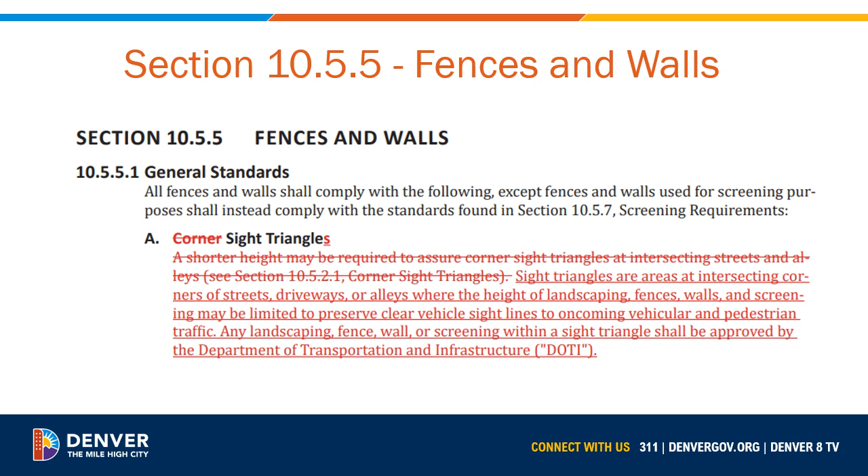In section 10.5.5, under corner sight triangles, we've clarified the requirement for sight triangles when a fence or wall may affect visibility at intersections with a street or alley, and that any landscaping, fence, wall, or screening within a sight triangle must receive approval from DOTI, the Department of Transportation and Infrastructure.

10.5.5.1c covers overheight fences, or the exception from maximum height. The criteria for the fence not being allowed to detract from the safety or pedestrian character of the existing neighborhood has now been added to item 2, and existing neighborhood is now a defined term in Article 13. That definition describes which blocks are included in the existing neighborhood for evaluation of the pedestrian character of the neighborhood.

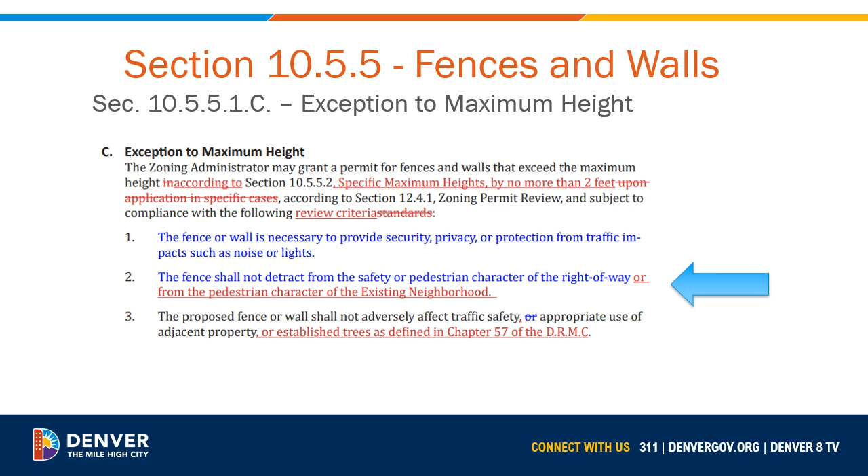Under the exceptions to maximum height, under point 4, this gives the ability to the Department of Parks and Recreation to approve an overheight fence adjacent to a designated parkway.

Point 5 states that any section of an overheight fence or wall shall be a minimum of 50% open. The 50% open standard now has a rule of measurement in Article 13 as well, in 13.1.13. And in point 8, staff approval of overheight fences and walls is limited to an increase of no more than 2 feet above the maximum allowed.

Any height greater than 2 feet over the maximum can only be approved through a zoning variance by the Board of Adjustment.

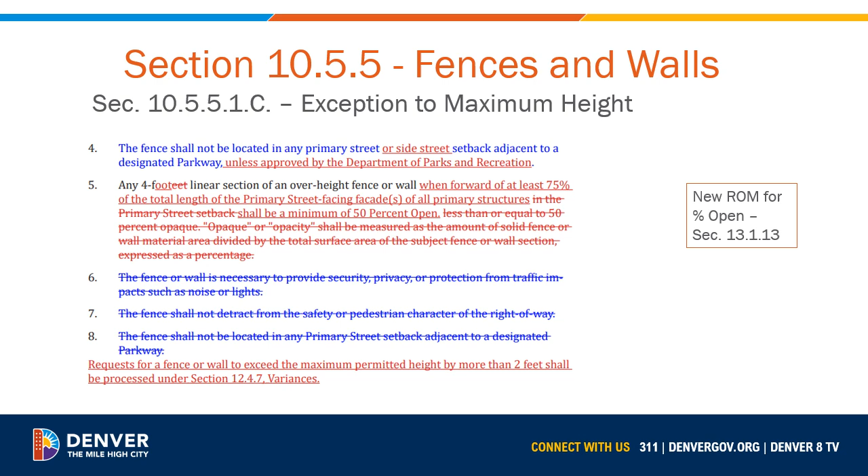Under the material standards in 10.5.5.1e, there's a new allowance for the installation of barbed wire or a non-lethal electric fence system if it's approved by the Denver Fire Department, without limit, and there's no zoning permit required. This is only allowed in the IA, IB, and National Western Center campus zone districts.

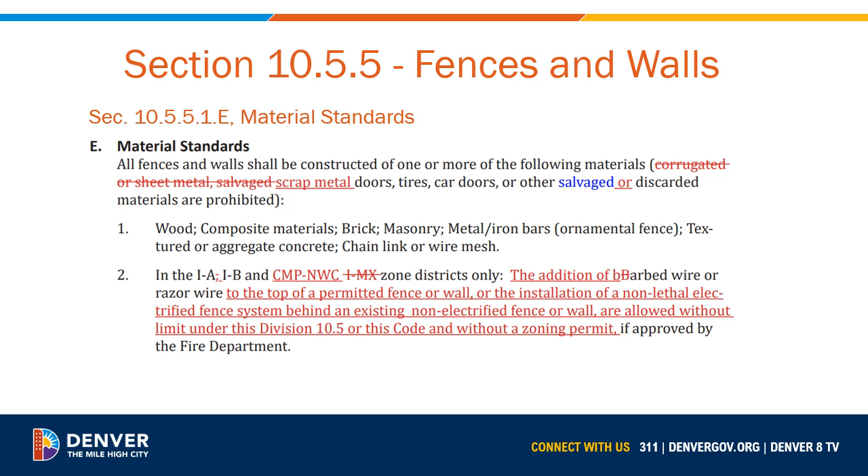Under section 10.5.5.2 for specific maximum heights, we've consolidated the maximum height standards for all zone districts into one section of code rather than repeating them in multiple sections.

The applicability section now refers to fences and walls accessory to single unit or 2-unit development and to all other primary uses in all zone districts except for IA, IB, and the National Western Center campus district.

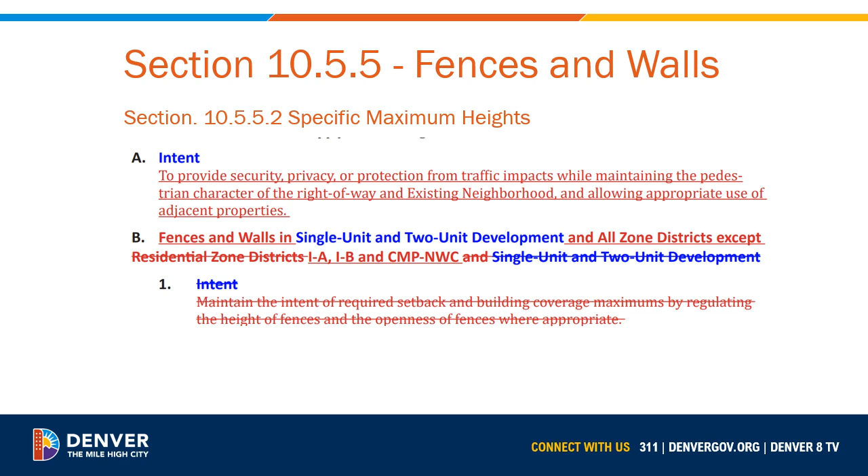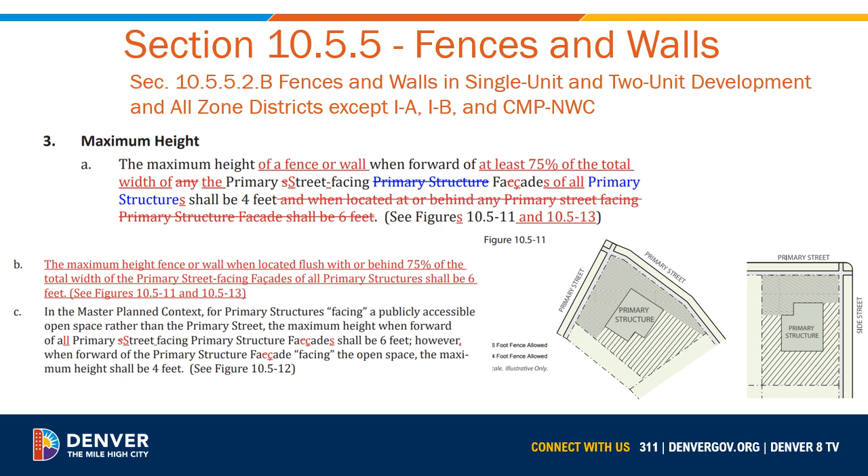This section for mixed-use commercial zone districts, OSB and OSC, has been removed because these have all been incorporated into the applicability of B above. The standards were substantially the same, so this reduces the unnecessary repetition.

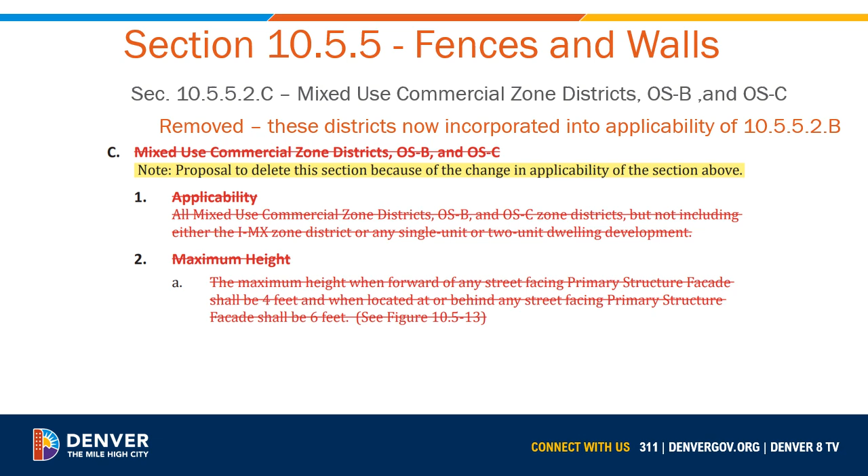Moving to the section for fences and walls in IA, IB, and the National Western Center campus zone districts now. Just a point of clarification: this will show up here as D, but in the new section, the letter C will be where this was found due to the deletion of the prior section.

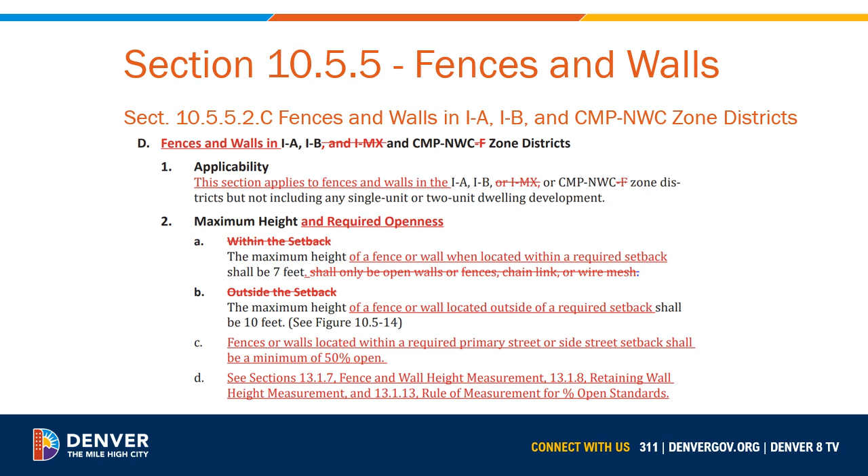These changes are mainly rephrasing for readability and adding references to rules of measurement, such as the new rule of measurement for percent open standards in section 13.1.13.